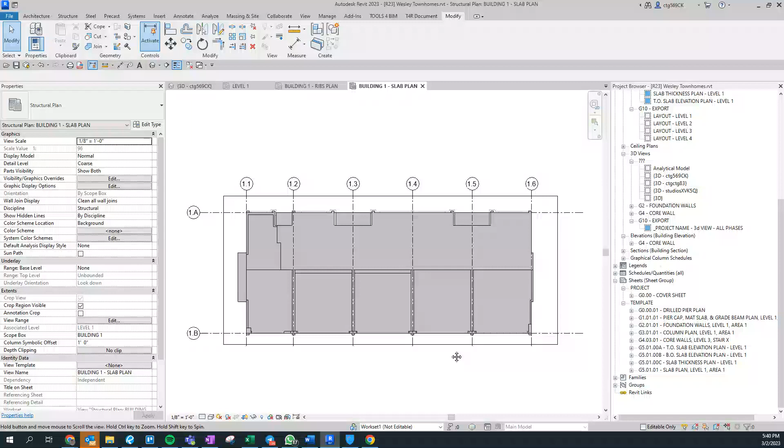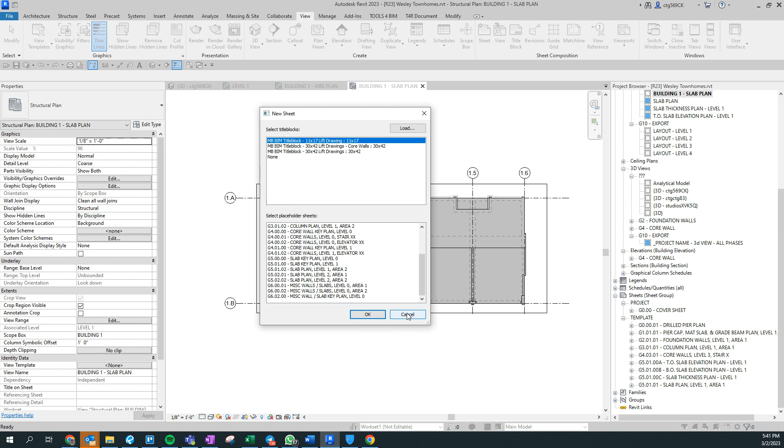So now let's go ahead and start setting up our sheets. The problem is that if I want to create a sheet here called G1.00.01 or something like that, there might be something already in here, like G1.00.02, so there's all these placeholder sheets. What we want to do for a project like this is get rid of all these placeholder sheets and template sheets. They're not very useful to us, so let's go ahead and delete those.

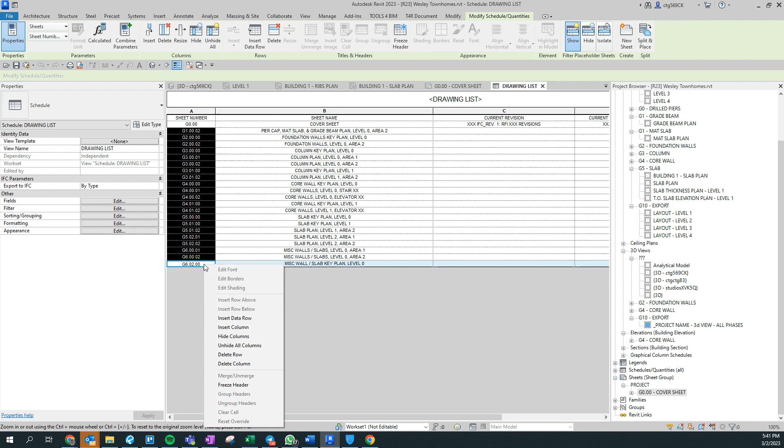And if we want to delete those placeholder sheets, we have to come into the cover sheet here, and into this drawing list. These are all those placeholder sheets, and they're getting in our way. All I'm going to do is come in, delete those rows, and it's deleting the selected sheets perfectly fine.

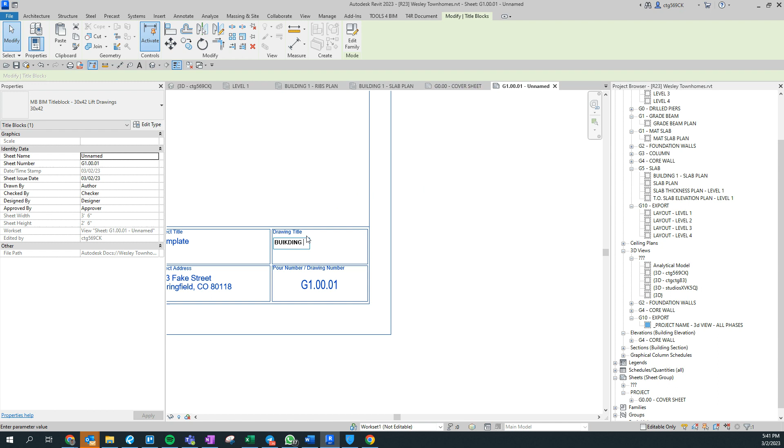Now, nothing for you to do because I've already done this for you on this project, but let's go ahead now and create our sheets. So for me, since I'm working on building one, I didn't mean to open this. I want to call this G1.00.01, right? Building one ribs.

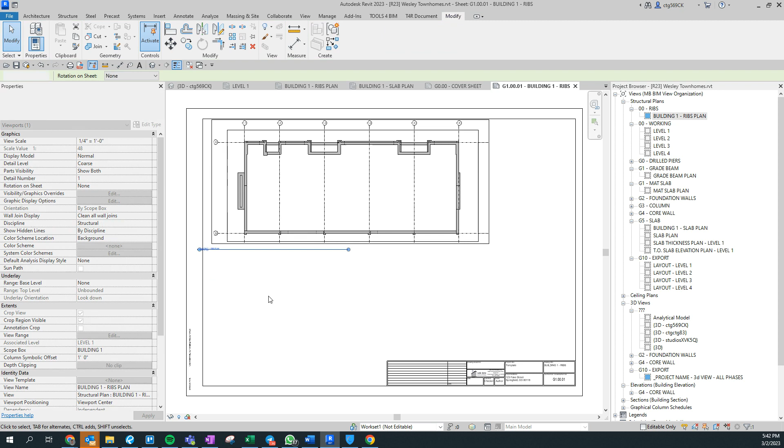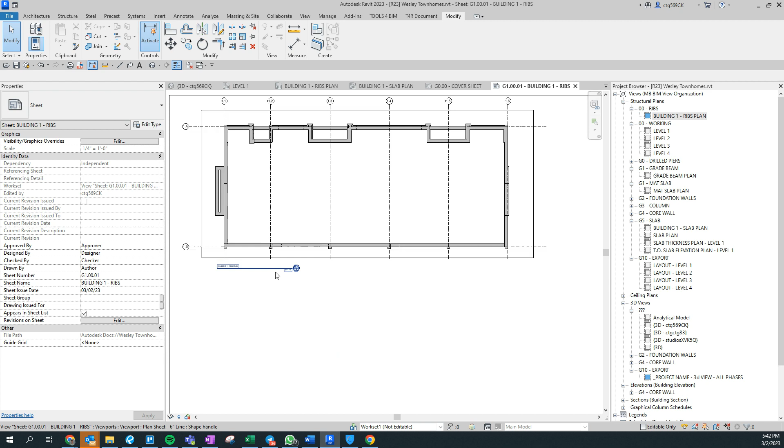Now you can see this is really small, too small in fact. Let's get this to a scale that's much easier to use. I think this is still going to be okay for building 1 because we've still got space. So I'm gonna call this, or put a plan sheet at a 6-inch line here. Now, I think it's worth it for us to also go ahead and add a 3D view, but we'll do that a little bit later.

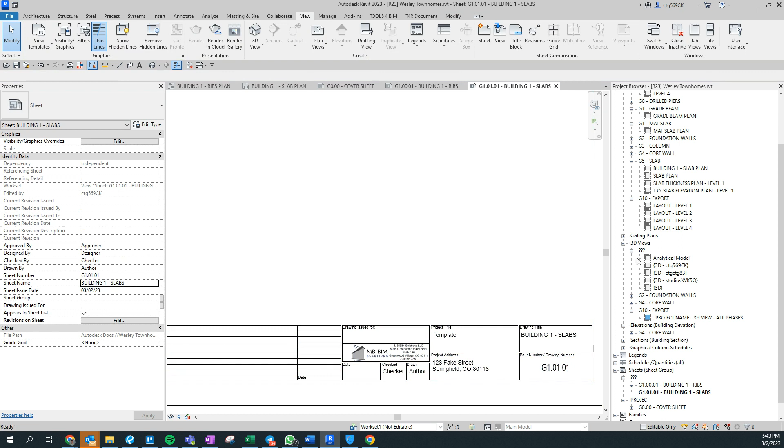Let's go ahead and create another sheet called G1.01.01, right? And we're going to call this building 1 slabs. Let's do the same thing for our slab plan that we did for the rib plan, and we'll change the scale on it. That is entirely too small and not necessary to be that small, so we'll change it to 1/4 inch, something a lot easier to read.

Okay, let's also make sure that we take both of these sheets, and I'm going to put them into the sheet group G1 building 1.

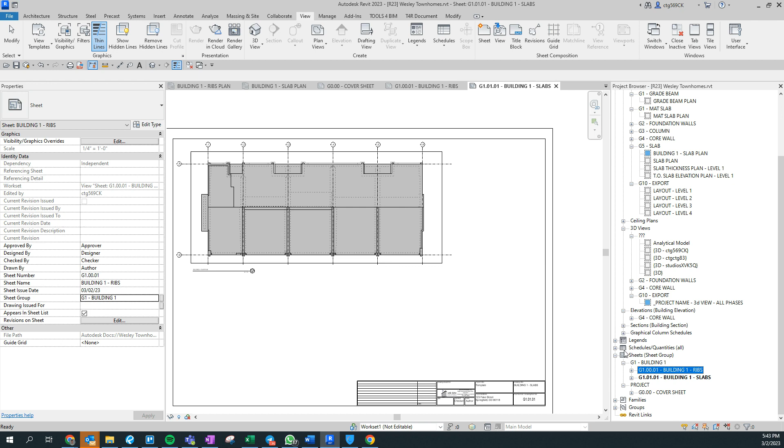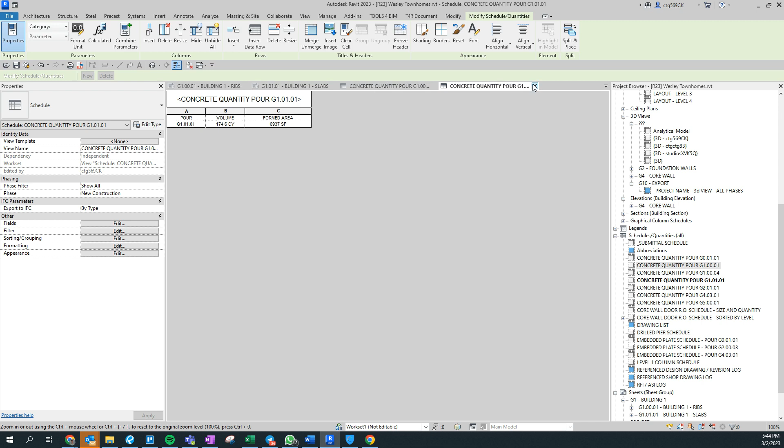All right, and then we also need to add our schedules, so let's go ahead. G1.00.01, our filters. Remember, we don't like to see grand totals if the pour is the same, right? And then let's duplicate this, G1.01.01, and put that down here.

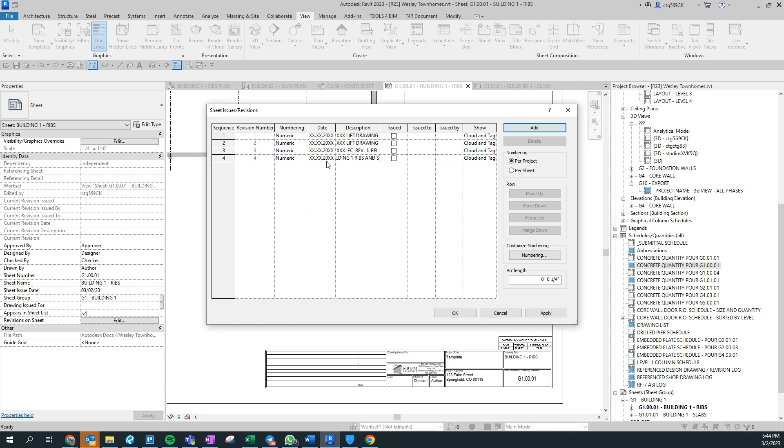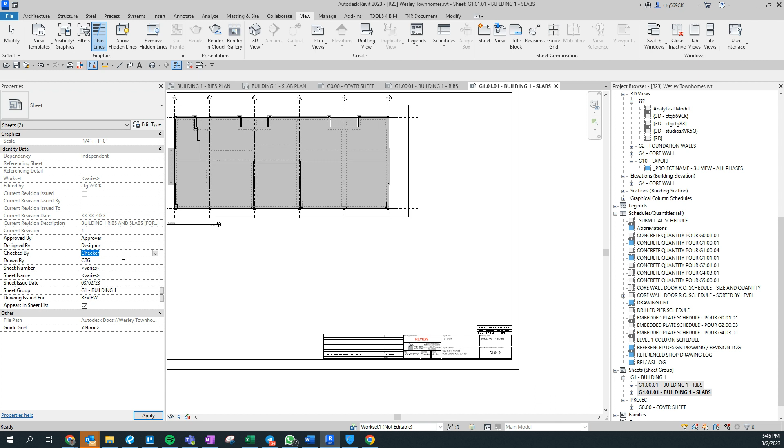Okay, let's also create a revision. I'm going to just call it XX.XX.20XX, and I'm going to say building 1 ribs and slabs for review. So we'll do these for each of the buildings, and then we'll put that onto the sheet. And then for both of these, we want to say the drawings are issued for review, drawn by, let's say, CTG and CTG. Not that it'll always be like that.

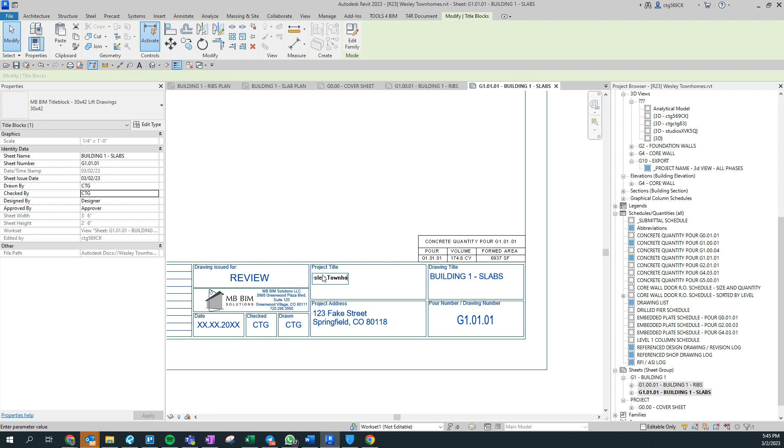No, and then we need to update our project information. Our project information is going to be here: 4101 Wesley Townhomes, and the address is 4101 Wesley Avenue, Denver, Colorado 80222.

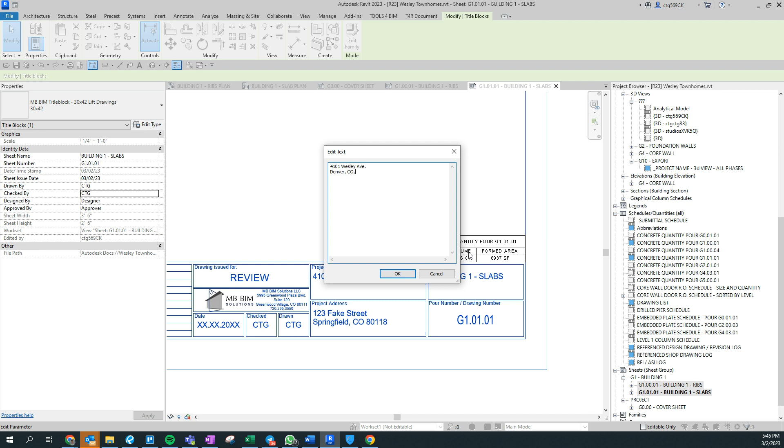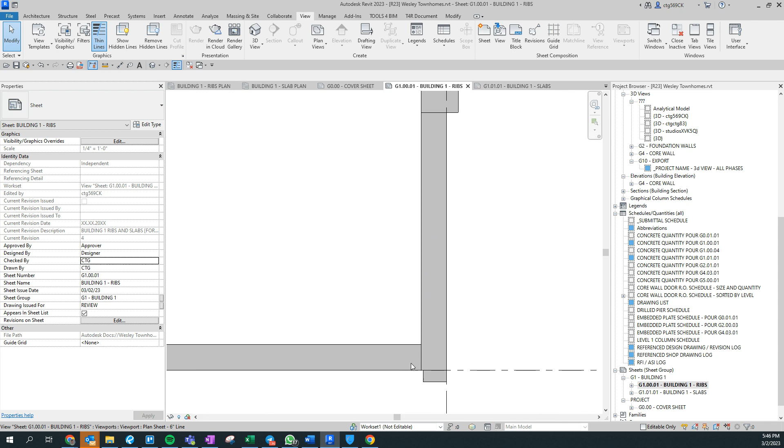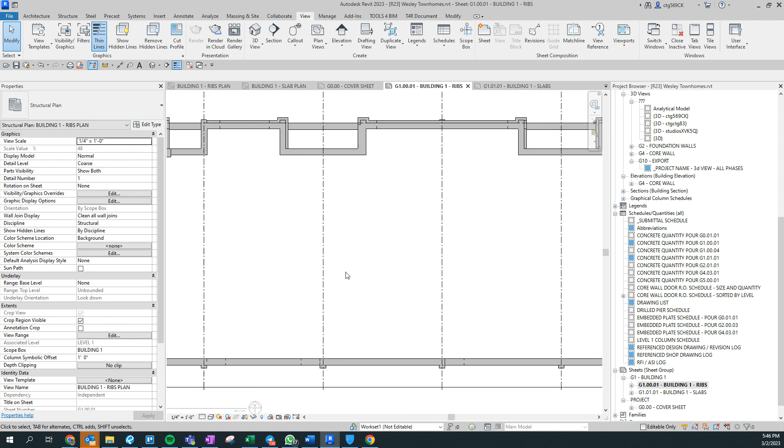All right, so all that information is in there in the project. We've got our sheets set up, and our ribs are looking good here. The only thing is that there might be some places where you can see our bottom of rib step, which is great, but we do want to maybe hide some of these lines. Let's make them invisible lines, places like this where the rib actually doesn't step, right? Remember, it's just a different rib. Same thing here, the rib doesn't actually step. And then we'll have something like that one. Looks like this is coming together pretty good, so let's leave it at that.

And then next thing we'll look at are setting up 3D views.